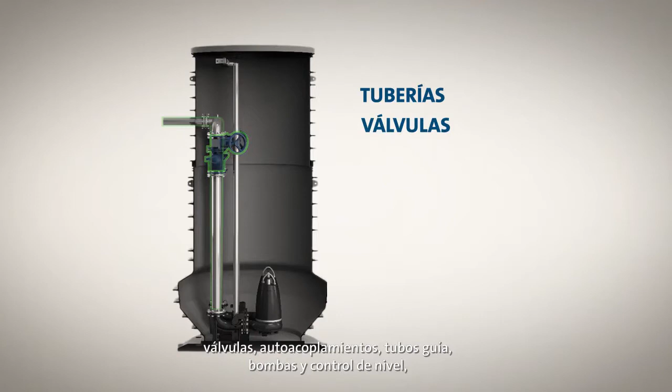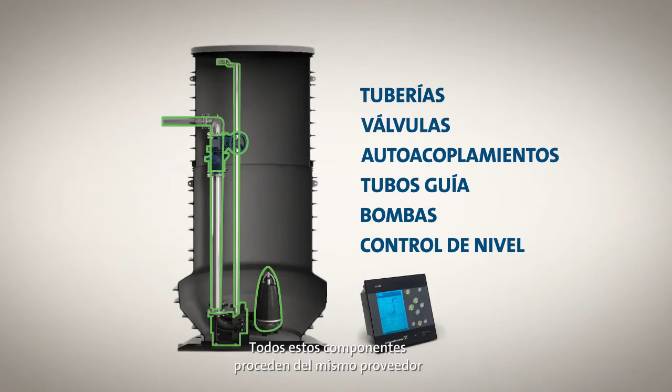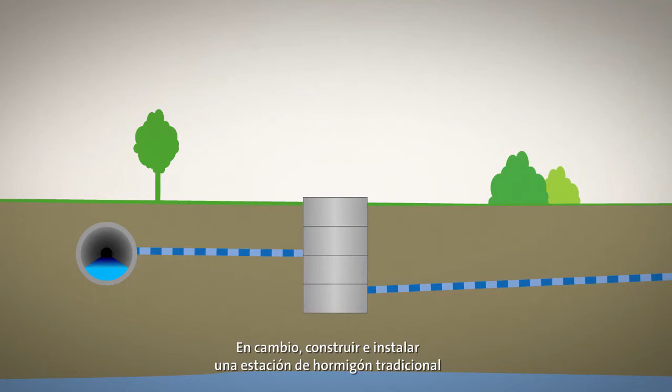Prefabricated pumping stations are supplied with piping, valves, auto-couplings, guide rails, pumps and level control, ready to lower the pumps down to the auto-couplings. All these components are delivered by the same supplier as well as in the same unit, securing a cost-effective operation and ensuring that all parts fit perfectly. In contrast, building and installing a traditional concrete station from scratch is far more time-consuming.

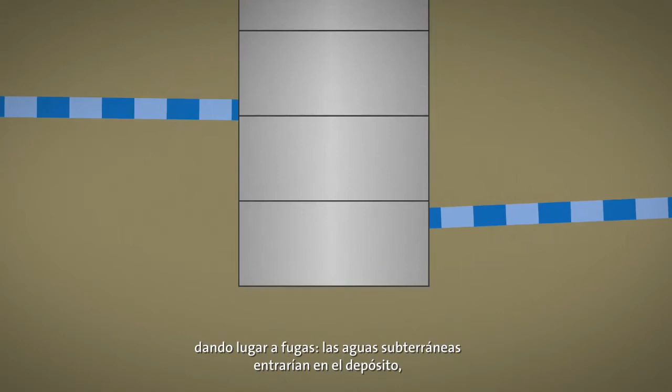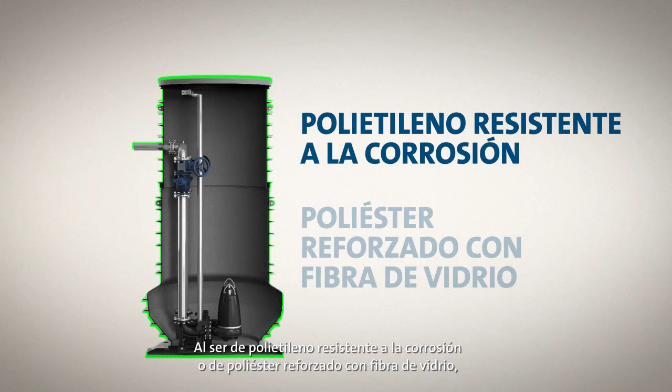Moreover, concrete installations can crack over time, which creates leakages, meaning that groundwater can enter the tank while wastewater leaks out of it. Such leakages don't occur in prefabricated pumping stations. Made of either corrosion-free polyethylene or glass fiber reinforced polyester, the prefabricated pumping stations can avoid leakages for years, making it a much more reliable solution than its concrete counterpart.

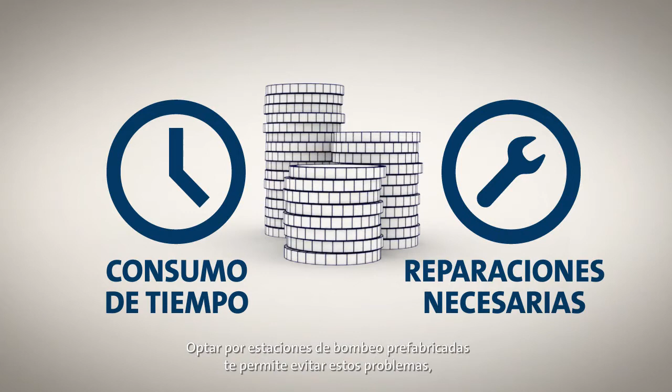Both the time consumption and necessary repairs to the cracks result in a much costlier operation. Opting for a prefabricated pumping station lets you avoid these issues, demonstrating the cost-effectiveness of prefabricated pumping stations.

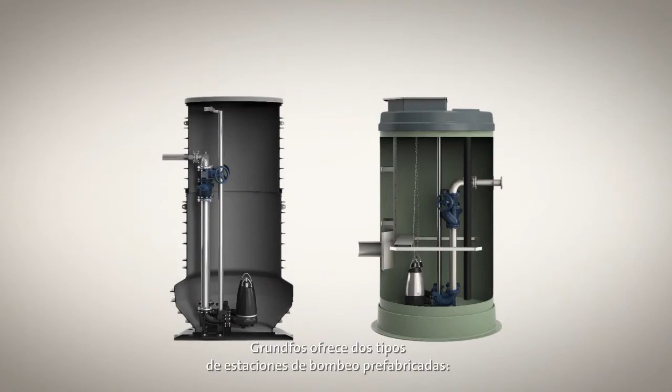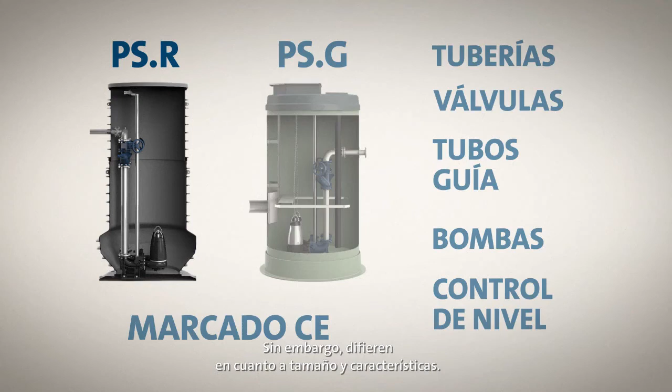Grundfos offers two different types of prefabricated pumping stations, PS.R and PS.G. The systems, including the pumps, are both CE marked when delivered with piping, valves, guide rails, pumps and level control, which saves you the trouble and cost of risk assessment. They do, however, differ in terms of size and features. So let's take a closer look at them, starting with the PS.R.

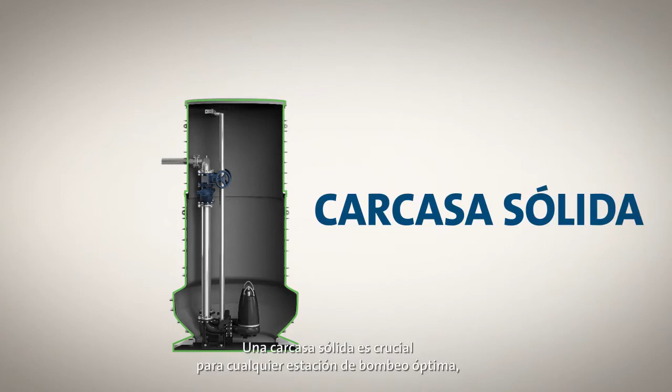A solid shell is crucial for any successful pumping station, and the corrosion-free polyethylene of the PSR provides just that. Polyethylene is highly resistant to aggressive liquids, which helps prevent cracks and leakages. This ensures a high level of reliability.

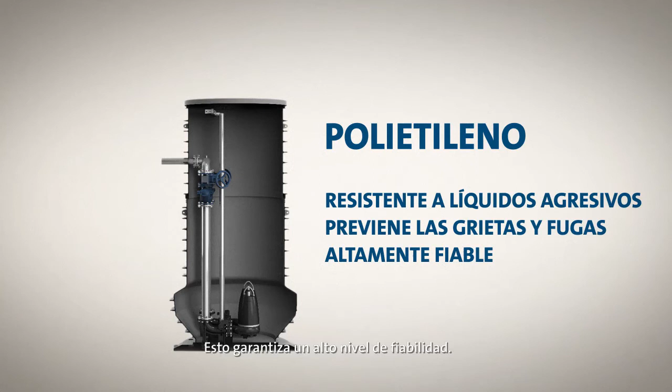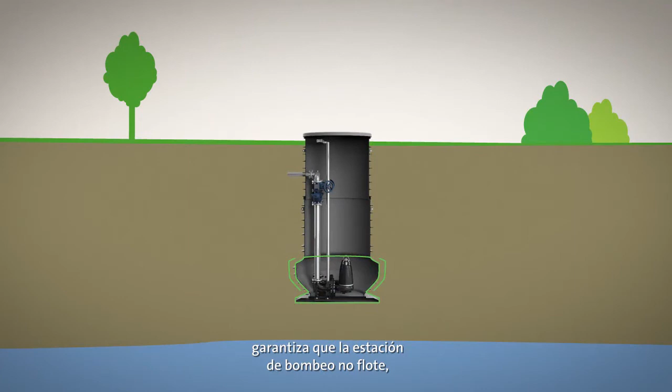One of the most unique features of the PSR is its sump. Together with the ribs of the main section, the sump's extended shoulder design ensures that the pump station avoids buoyancy even without a concrete foundation. Compared to other stations, the PSR merely needs a gravel foundation, which with regard to installation makes it the most cost-effective solution. Additionally, the sump is designed with self-cleaning properties, which helps reduce the sediment of sludge and odor, thereby minimizing maintenance costs.

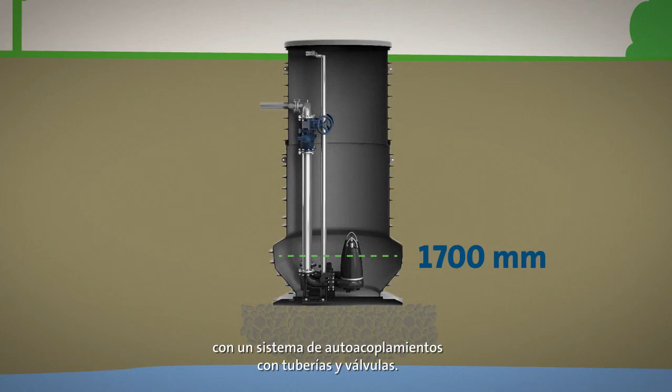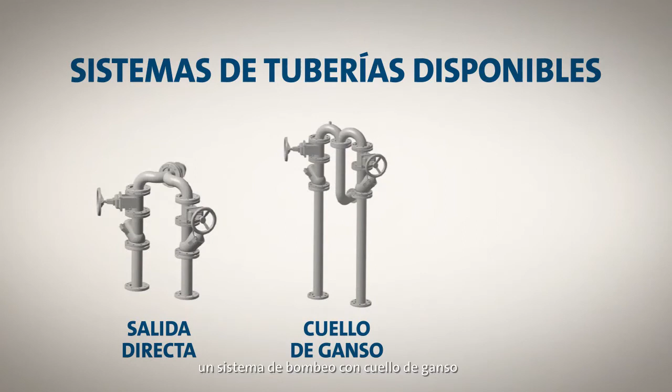In terms of size, the sump provides a diameter of 1,700 millimeters, giving the necessary space for installation of two submersible wastewater pumps on an auto-coupling system with pipes and valves. Grundfos offers the choice of three different pipe systems for the PSR pumping station: a pipe system with direct outlet, a pipe system with gooseneck, and a pipe system for the valve chamber. And if these standard solutions don't fit your needs, Grundfos offers customized modifications.

High-quality valve chambers are also part of the package when selecting a PSR. One of the main benefits of a valve chamber is that you'll avoid having to enter the wastewater station if the valves need to be inspected and operated. Apart from being a practical solution, it's also a more environmentally friendly one.

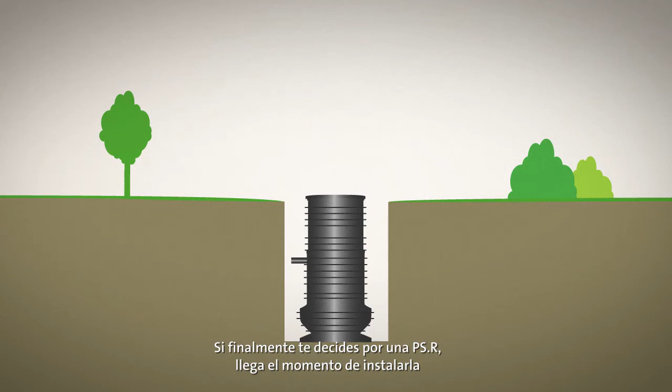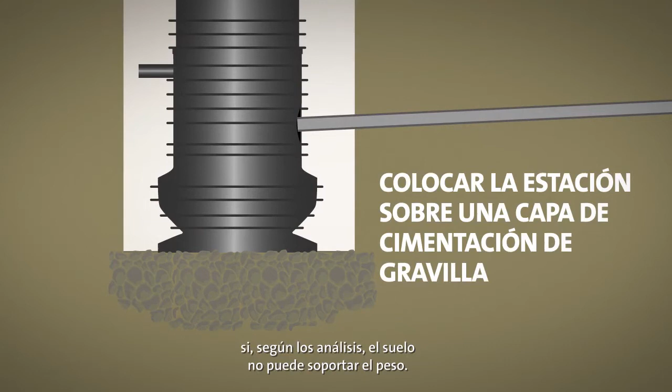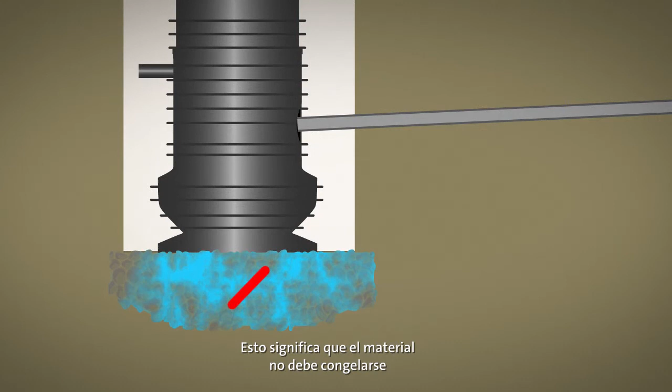Once you've decided on the PSR, it's time to install it and connect the inlet pipes by means of a hole drill and rubber profile sealing. First of all, it's crucial to place the pit on a foundation layer of, for instance, gravel, if soil analyses show that the soil isn't capable of bearing the weight. Secondly, it's important that the bedding layer is compactable and composed, so it doesn't cause any damage to the pit. This means that the material must not be frozen or, for instance, contain traces of sharp flint or other damaging particles.

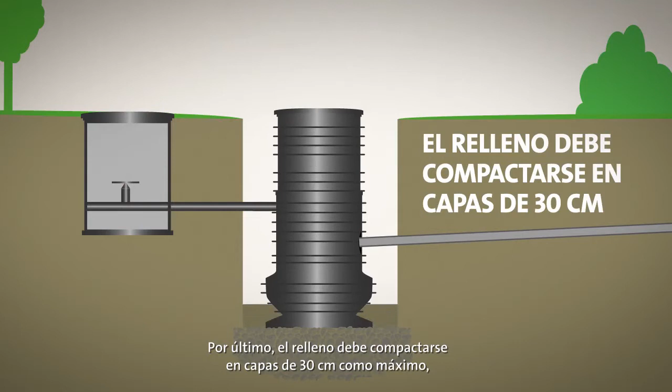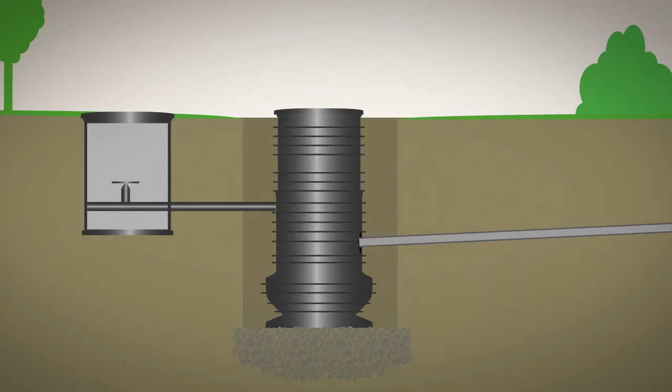Finally, the backfill must be compacted in layers of maximum 30 centimeters, corresponding to approximately 20 centimeters after compaction, in order to provide a sufficient level of support on all sides, ensuring that the load can be transferred without detrimental impacts. If this step is ignored, you're running the risk of damaging your station. The same instructions should be followed during installation of the valve chamber.

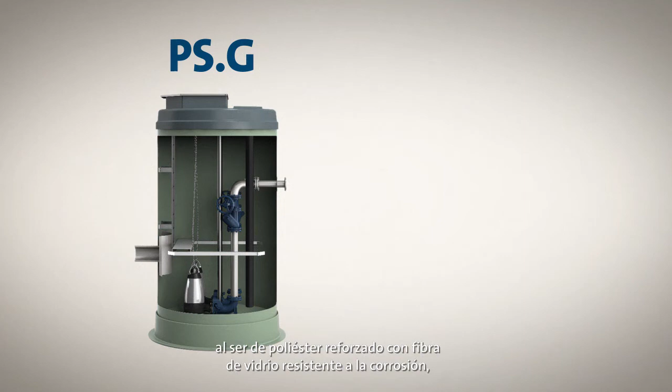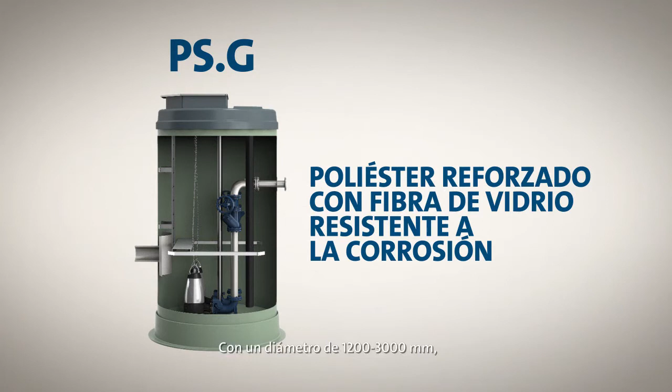So now that you're acquainted with the PSR, let's turn our attention to the PSG. A PSG pumping station is made of corrosion-free glass fiber reinforced polyester, exceeding the lifetime of a traditional concrete pumping station by far. With a diameter of 1,200 to 3,000 millimeters, it can provide a much larger amount of space than the PSR, and therefore it is also prepared for bigger pumps, highlighting one of the main differences between the two. Another significant difference is that it needs to be locked to a concrete foundation slab by means of brackets and bolts in order to prevent buoyancy.

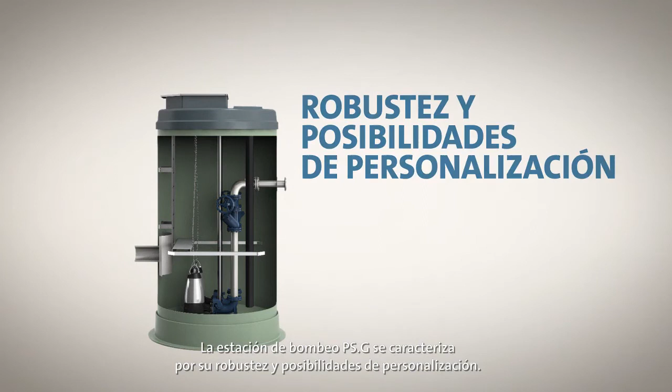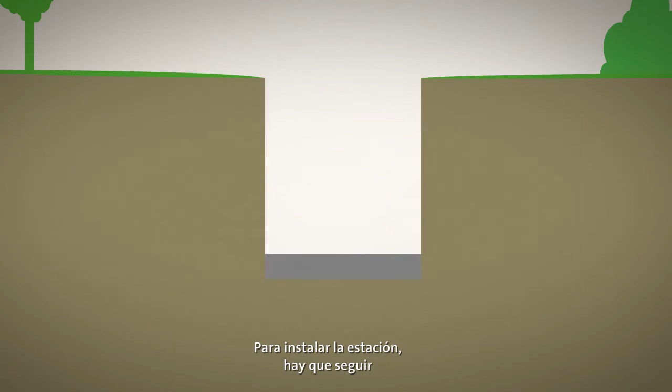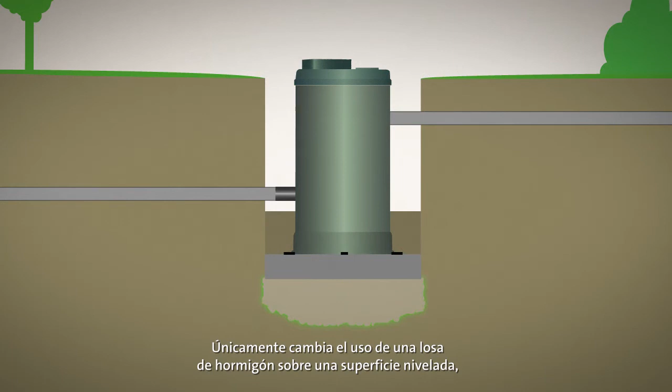A PSG pumping station is characterized by its robustness and customizability. The sheer size of the PSG allows for several optional features such as baffle plates, screen baskets, access hatches and service platforms, demonstrating the ability to customize the station according to needs. When it's time to install the station, you merely need to follow the same installation process as we outlined for the PSR. The only change is its use of a concrete slab on a leveled bottom, filled with a foundation layer rather than just gravel as a bedding layer.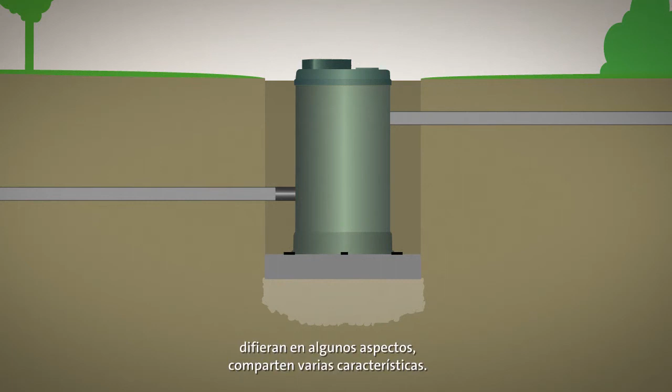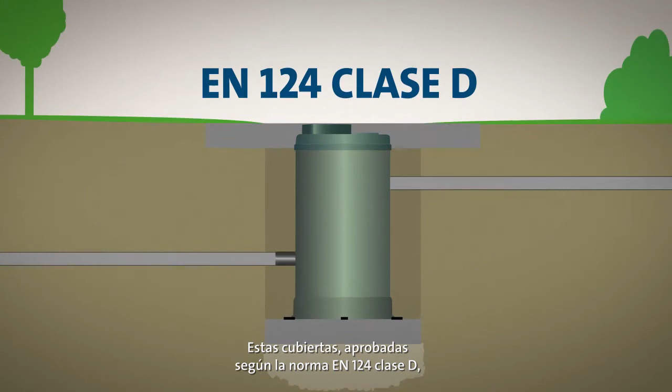Even though the PSR and the PSG differ in some areas, they do share several features. One example is the covers for traffic. The traffic covers are approved according to EN 124 Class D, carrying traffic load of up to 40 tons and come in several versions. One version features a concrete ring, an extended cover and a steel hatch. In this installation, it's perfectly acceptable for the concrete ring to be visible at the top. Such an installation is easy, meaning that this version is the slightly more cost-effective solution.

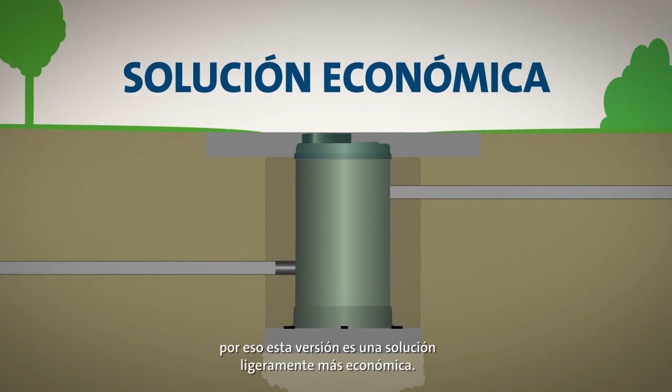There is, however, a more advanced version. It's a similar installation, but without a visible concrete ring at the top. Instead, a floating cover at the top means that it can be adjusted to level with the asphalt. At the same time, such a solution means that it can be adjusted when new asphalt is laid.

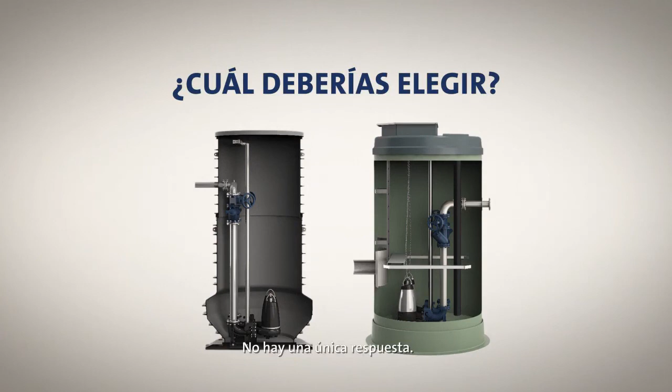Now that you're familiar with both stations, which one should you opt for? Well, there's actually no fixed answer as such. It mostly depends on the individual advising engineer and the location. Both prefabricated pumping stations can be customized according to your needs. Therefore, they're ideal for almost any requirement, regardless of the complexity.

Grundfos can help you make the right investment. By using Grundfos Pumping Station Creator, you can design your station in a matter of minutes. Here, you'll be able to specify size, features and functionalities while choosing from a wide range of pumps, controls, pits, valves and much more.

So, let's recap some of the main points we've established in this task. Prefabricated pumping stations are easy to install, cost-effective, reliable and customizable. Along with the smart built-in functions, these features underline just how good a solution a prefabricated pumping station is.